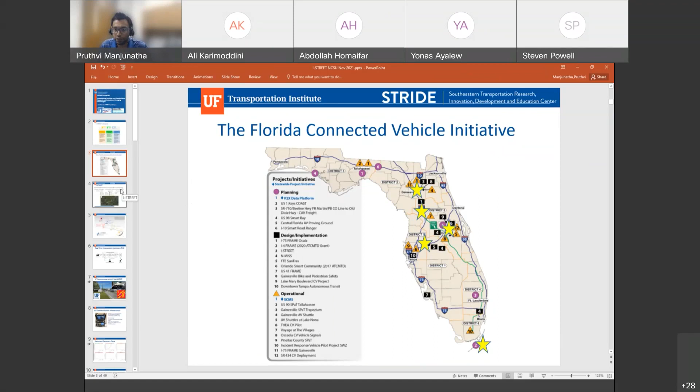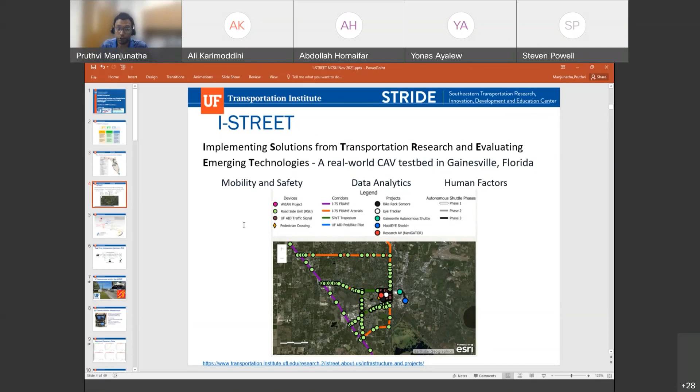So I told you today is going to be more of a story of iStreet. So we'll use this as a roadmap for our presentation today. This is how the presentation is going to flow. We started out in 2017, so I'll start in 2017, go through the key projects, and then we'll end up with present day and future.

Back in 2017, FDOT was figuring out this CV, AV, and CAV; terms were being thrown around, and they wanted us to do a simple literature study to see where the state of the art was at that time, and see how to bring Florida to the forefront of this. So when the conversation picked up in late 2016, early 2017, the City of Gainesville, UF, and the Florida Department of Transportation sat together and gave birth to the iStreet program. One of the first few funded projects under the iStreet program was co-funded by both Florida DOT and the National Science Foundation.

And as a product of that, we came up with this optimization software called Real-Time Intersection Optimizer. As you can see, there are three main black boxes here. One is a sensor fusion system. What it does is it takes input from different sensors, be it video, radar, lidar, DSRC signals, and it fuses all of them together to come up with a reliable vehicle arrival stream.

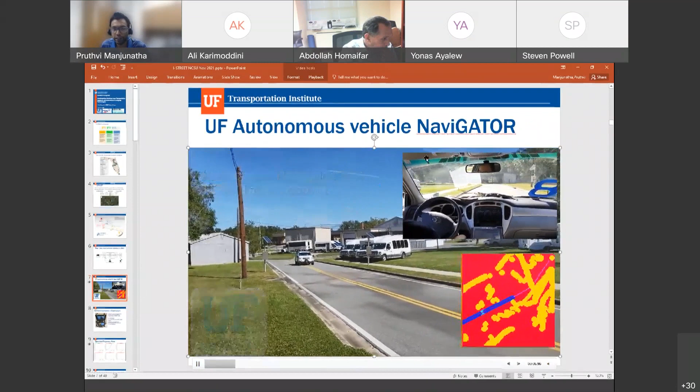So this is our AV. This is our custom AV from our mechanical engineering department. We call it the NaviGATOR. We use this. We also came up with our own custom OBUs. We built this radio kit ourselves. And then we took it out to the field and did the testing at the DOT facilities.

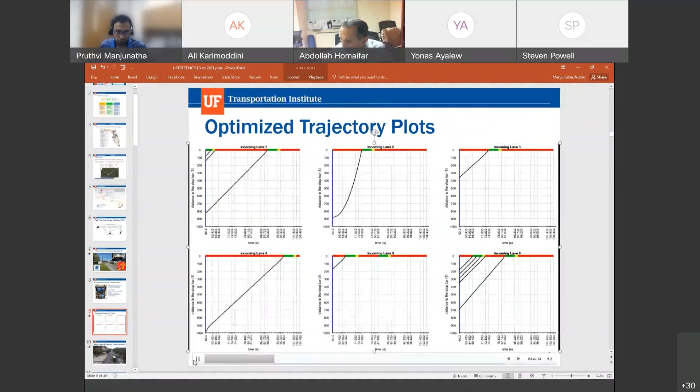So this is what a typical output of recommended trajectories looks like. With every iteration of the software, we are thinking about the best way to design these trajectories, to have a smooth movement, and not having to do the optimization routine n number of times. We are always trying to improve how this trajectory planning looks. So the next plan is to implement it on the actual road here in front of our football stadium, the Swamp. Once implemented, it should look something like this.

So the solid line actually is the tracking of the actual vehicle, which comes from the actual sensor fusion of radar and video and other sensors, whatever is available. And based on that, the bubbles that you see are the recommended trajectory for every second, right? 3 seconds from that point, it's supposed to be here, for example. So this is how our real-time intersection optimizer works.

This is a co-funded project by FDOT and NSF, and we got funded again a couple of years ago to add pedestrians and lidars into the mix. So this is a living, breathing project we intend to keep going. So once projects like that were born, FDOT also funded the I-75 FRAME project, where FDOT installed a number of roadside units on selected sections of I-75, as well as the arterials that connected to I-75.

Following that, FDOT funded multiple projects. One is the Gainesville SPaT Trapezium project, and the other one is the Gainesville Pedestrian Bicyclist Pilot. So the Gainesville Pedestrian Bicyclist Pilot is basically a number of CV applications related to pedestrians and bicyclists. It was funded a couple of years ago. Right now, it's still on hold because of right of way and other logistical issues. So it is supposed to go live pretty soon this year.

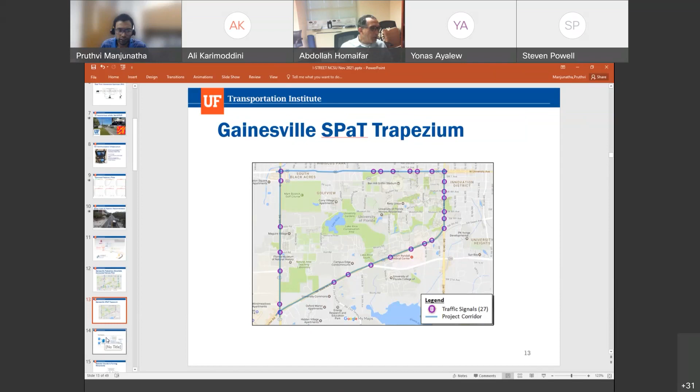So we developed this data pipeline to automatically get not only the roadside unit data and the logs from the roadside units, but also ATSPM data and the loop detector data. All of this is pushed into our AWS cloud, we store it and process it, and we have developed an algorithm to convert loop detector data into turning movement data. Once we manually edit each signal as an intersection and run this algorithm, it automatically generates turning movement counts from the loop detector data and any other sensor data stored on our cloud.

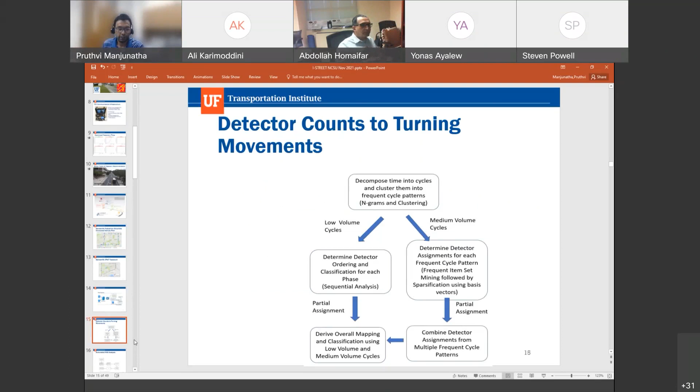Since we work with the McTrans folks associated with UF, who housekeep the Highway Capacity Software, we also have access to its backend. So we have created a system where we automatically convert loop detector data into turning movement data, and that is automatically input into our highway capacity files for each of these intersections. Every month or every week, we can monitor the level of service of all these intersections, so instead of one before and one after period, we have n number of after periods and can do a continual evaluation.

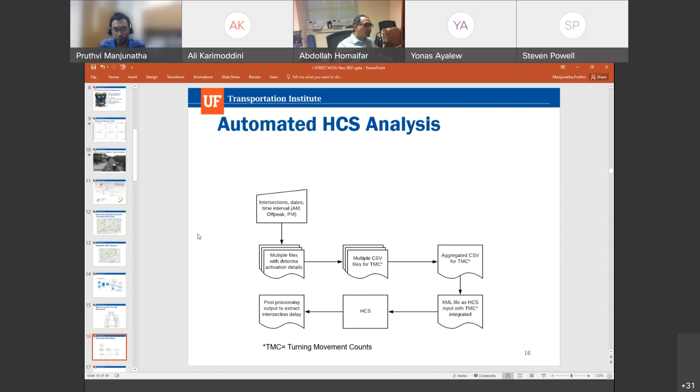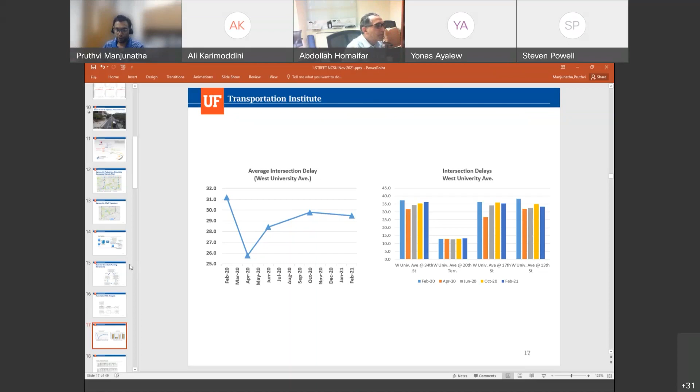We also, as I told you, interviewed the onboard unit users. Some of the things we found out from the interviews was that the OBU interface itself was very primitive, but the users still found the interface to be helpful, especially when it comes to warnings from pedestrians and bicyclists. UF campus has a lot of bicyclists, pedestrians, as well as scooter users. And the drivers said the warnings were actually helpful for them to be more cognizant of other road users other than other cars on the road.

And they also had suggestions for us, saying that instead of just a visual-based system, if there was also an auditory input, it would be useful. And also, if the OBU was integrated with an existing navigation system, they wouldn't have to use two different things for their GPS and the warnings. Those were some of the OBU experiences. Overall, it was positive, but there was definitely room for improvement, as indicated in our focus groups.

I'm going to take a small break here. Now that I've discussed these couple of projects, I want to see if there are any questions now, or if you guys want to keep the questions till the end. So one quick question is, were there any attempts to infiltrate your OBUs or any of your other infrastructure?

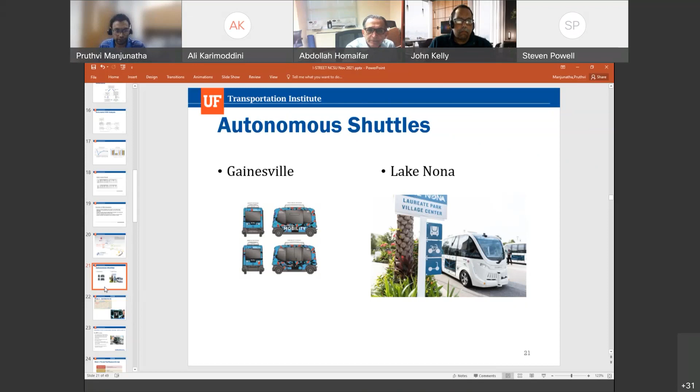One of the interoperability things I mentioned was, when this shuttle comes close to UF, it intersects with the previous SPaT trapezium project I mentioned. So when it's going through one of those RSU-enabled intersections, there is an OBU inside the shuttle. It is able to easily talk to the RSU, and it gets the signal and it makes the turn automatically. Typically, if you look at some of the other shuttle deployments, when there's an intersection, the service operator usually manually operates the shuttle. But in our case, in Gainesville, it's completely CAV enabled.

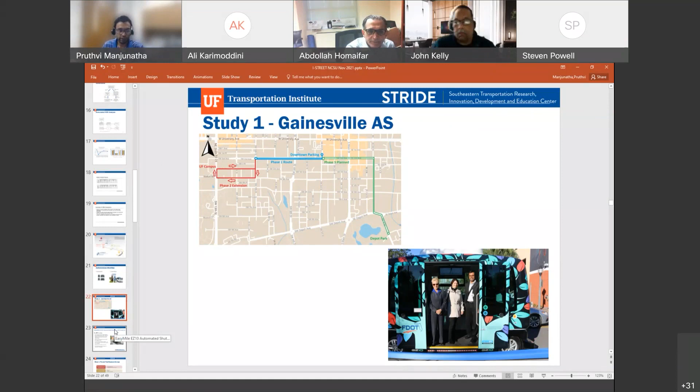Having iStreet as a program is useful in this sense because there are two different companies that are operating, and somebody had to bring them together and make this work. So small changes like this, which can add big value, is where iStreet has its role.

I'm pretty sure, if you are in the world of connected and autonomous vehicles, everybody knows that there are basically three major shuttles in the US. One is the EasyMile shuttle, the other one is the Navya, and the third one is the Olli. Right now, I believe EasyMile is number one, followed by Navya, and Olli is catching up with them soon in terms of the number of deployments in the US. And most of these shuttles, although they say they can go up to 25 miles per hour, actually operate anywhere between 10 to 15 miles per hour.

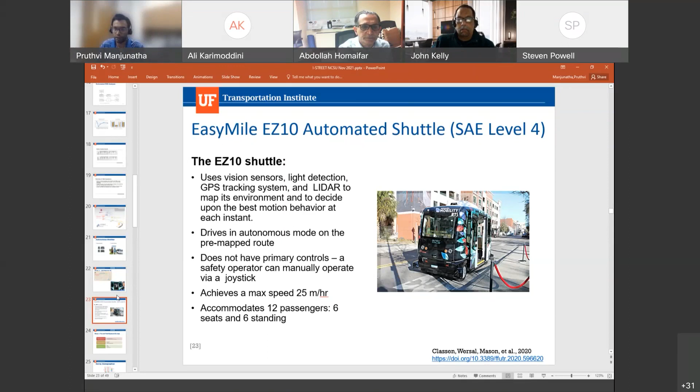This is because the more elements there are on a road network, the slower the shuttle is to react. I talked to the shuttle operators and the EasyMile folks and the Navya folks. The common message I'm getting is that the limitation is because of the capability of the sensor suite. If they have a better sensor suite, they can actually operate at 25 miles per hour, but the cost doesn't exactly work out right now. So the short answer is, although they say it goes at 25 miles per hour, at any deployment in the US it's typically 10 to 15 miles per hour. That's going to be an interesting thing as I talk about this study.

In our survey, we basically concentrated on three different categories. One, the travel behavior and technology use of the participants and their demographics. And as far as the shuttle is concerned, most studies in the literature only care about the shuttle riders themselves, and they don't really survey how a driver or a pedestrian would feel if they have to interact with a shuttle. So those two components were added in our survey, compared to the literature.

So here are some interesting results. In terms of survey demographics, our after survey had to be done in the post-COVID era. So most of our after survey was online, and we did leave some QR codes on the shuttle itself and at the shuttle stop. So we got way more women responding in our after survey, because the literature shows that women tend to respond more if the survey is online, and also because the college students were not as much in Gainesville during the post-pandemic era. We had the under 25 demographic go down in our survey.

So we asked questions like how comfortable they are, either riding in the shuttle or interacting with the shuttle as drivers and pedestrians. As you can see, for riding, they were tentative in the before survey, but once they have taken the ride, or at least seen the shuttle themselves, their confidence goes up dramatically. They strongly agree that they're very comfortable taking a ride in the shuttle. The same thing with pedestrians and bicyclists.

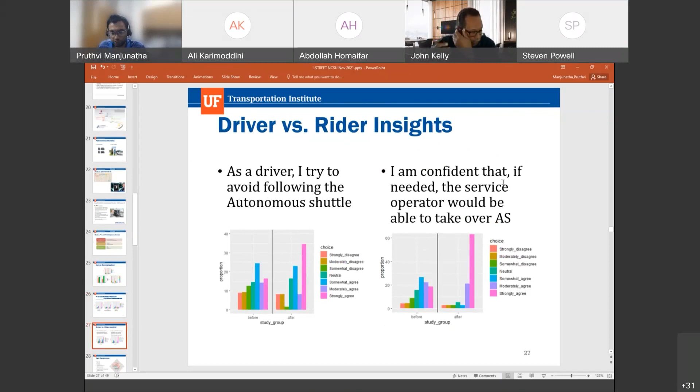We also did a text cloud based on the text responses. The first major category was always about the speed. Why is this shuttle so slow? Why is it clogging the road? So the speed limit both in Gainesville and in Lake Nona was 25 miles per hour, and the shuttle goes at anywhere between 10 to 15 miles per hour. Obviously, the drivers are going to get frustrated.

In Gainesville, we also have traditionally this east-west divide. The west part of Gainesville is high income, majority white neighborhoods, and the east part of Gainesville is low income and minority majority neighborhoods. And these comments mostly had to do with Gainesville traditionally rather than the shuttle itself, as to why are the authorities spending so much money on the shuttle rather than improving the bus service in my area. Those are the sorts of questions we are getting.

But this is a misinformed opinion, because this was not funded by the city of Gainesville, right? This was funded by the Florida Department of Transportation. And if Gainesville said no, they very well could have taken this pilot somewhere else. So it was not that those funds could have been used to improve the local transit service, right? So again, this comes into miscommunication between the authorities and certain neighborhoods.

I'm talking more about this because we also did a study in parallel to assess the mobility and accessibility in different neighborhoods in Gainesville. Even in that focus group and that survey, we found this to be a common factor. And many of those surveyed didn't even know that Gainesville had a driverless shuttle, even though it was the after survey. And because of COVID, we also had some concerns about social distancing and shuttle size and so on.

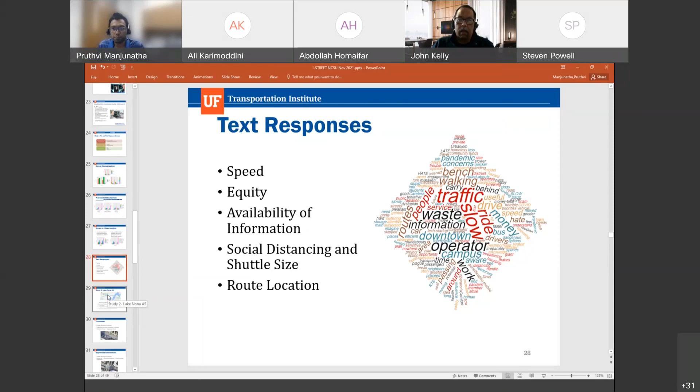So the next study I'm going to talk about is in Lake Nona, what we did was we put cameras in... Can I ask a different question? Yeah. Okay, in these autonomous vehicles, do you still have a driver in the loop in the car? Yes. Right now, most of these shuttle services have a service operator, although they don't do anything.

And then the result that you mentioned, whether passengers are confident and all that. Have you published those results, or can you share that information with us? Yes. We have a TRB paper coming up, so I will share the TRB paper with you. We are basically interested in the opinion of the passengers, how they feel about this autonomous vehicle. Yes. We are making the corrections as we speak for TRB in time. So I'm more than happy to share that with you.

And what about the data? Do you have a data set available for this study? Yes, we have the original survey. I will get in touch with my co-PIs to see to what extent that data can be shared. Sure. Okay. Thank you.

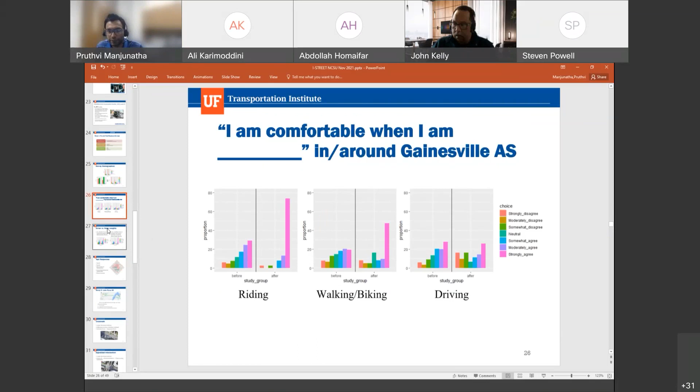All right. So for the second study on the autonomous shuttle, we went to Lake Nona. Basically, we put up static cameras. We took the permissions from the township and the operators to do this. We put them in three different locations: a crosswalk, a signalized intersection, and an all-way stop intersection, to see what sort of behavior we would observe. And we did it over a period of 2 days when we had relatively higher foot traffic from pedestrians.

There was a temporary island created because on farmers market days they have way more pedestrians than on other days. So they put up these temporary fences that created an island for the benefit of the pedestrians, but that messed up the detection of the shuttle. So the shuttle was often getting confused. Sometimes it would stop thinking that it's a pedestrian. Sometimes it would just go.

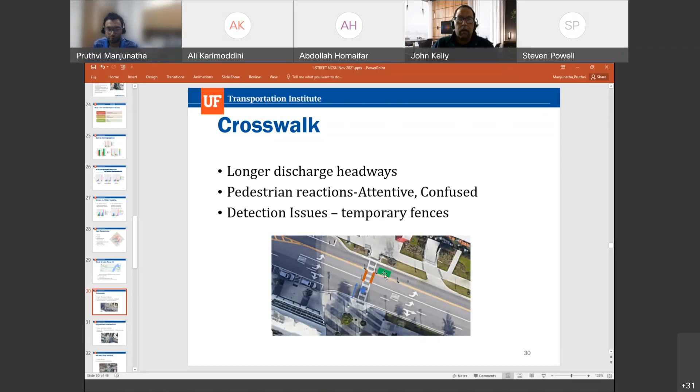And when it came to signalized intersections, because the shuttle was so slow, we saw this multiple times. Even before the shuttle, which is green, would go through the intersection, the vehicle behind it would make an illegal passing maneuver inside the signal box, right? Because of the slowness of the shuttle.

And similarly, there is a problem with the communication of the intention. At the stop-controlled intersection, the shuttle was supposed to make a left turn, right? So this is an all-way stop-controlled intersection. Everybody gets their right of way. So when the green shuttle wants to make the left turn, the blue through vehicle is supposed to give its right of way when it's the turn of the shuttle.

But the shuttle is sometimes so slow when it is making that turn that the blue human-driven vehicles actually think that the shuttle might be waiting for them to cross. So sometimes we see some dangerous maneuvers where some drivers just take off, although the shuttle has already started to make an extremely slow but definite maneuver to make a left turn, right? So there are a lot of safety-related issues that can come out of such a deployment.

So doing an observation using the cameras was helpful for us to come up with these nuts and bolts issues. Also, it confirmed what we already knew from our Gainesville study, that drivers are getting frustrated because of the slowness. And here on the video, we captured that because of the frustrated drivers, we are seeing a lot of illegal maneuvers, passing and aggressive maneuvers, which is going to be a safety hazard.

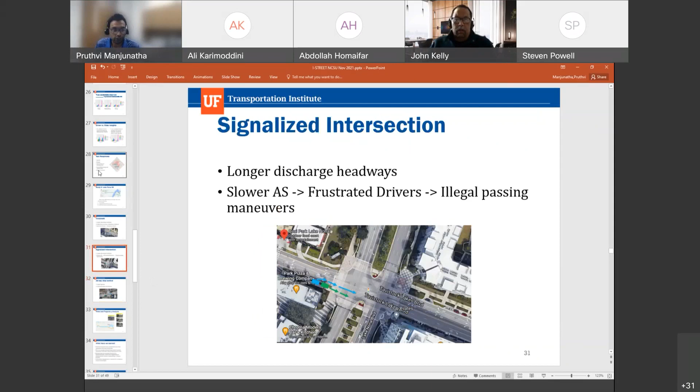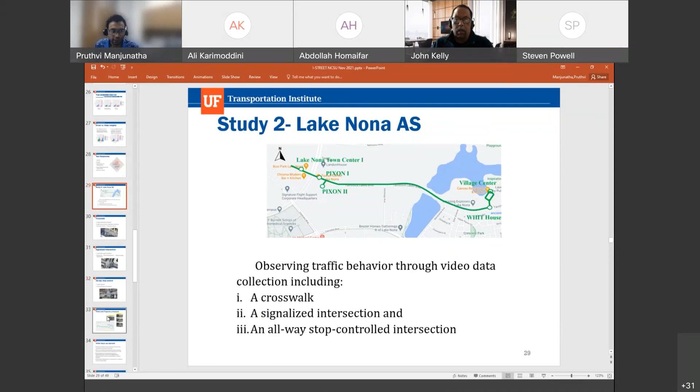And that dedicated lane also is intersecting with the traffic intersection as well, or no? So the dedicated part is actually between this all-way stop and the signalized intersection. I can actually show you in the map. So this is the intersection and this is the all-way stop. So I believe a small section in the middle has been remarked as dedicated right now. Okay, I see. Thank you. Yeah, great question.

So, along with the videos that we took ourselves, we also had access to the shuttle video facing outwards. Of course, they couldn't give the shuttle video facing inwards because that would be a privacy issue. So we got the videos from the shuttle looking outward. That means we were able to capture the human-driven vehicle that is following the shuttle, right? And we also got the trajectory data of the shuttle from the GPS mounted on the shuttle.

So when we combine the trajectory data with the video data, we can actually come up with leader-follower trajectories, right? And when we have both the autonomous leader and human-driven follower trajectory, now we have a data set to model human-driven vehicles. So we use a combination of image processing and trajectory manipulation to come up with this trajectory data. It's still a work in progress. We are planning to model human-driven vehicles in the presence of autonomous vehicles using this data. Should I say that this is studying the behavior of a driver when he's stuck behind a slow autonomous car? Yeah, you can say that.

Right now, you can also say that it's basically studying behavior of human-driven vehicles behind a very slow-moving traffic. That's absolutely right. Yeah, but as far as the fundamentals are concerned, the basic methodology is concerned.

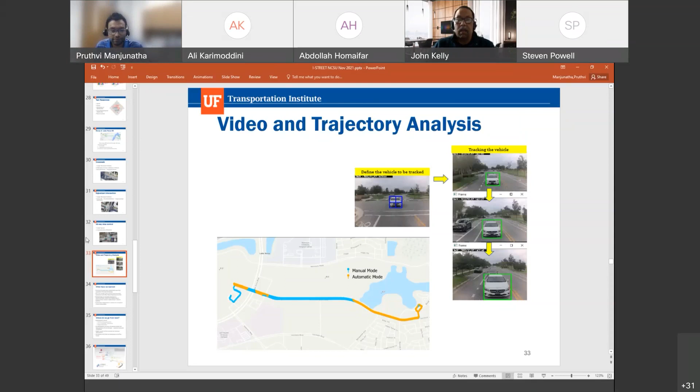Okay. So what we learned from both the studies is people are getting used to this technology and they're warming up to the idea in a positive way. Major concern is the slow speed of the autonomous shuttles right now. And for both of the studies, we had to work with multiple stakeholders. With Gainesville, it was EasyMile, the shuttle company, Transdev was the shuttle operator, City of Gainesville, and RTS was the transit agency responsible for the entire project.

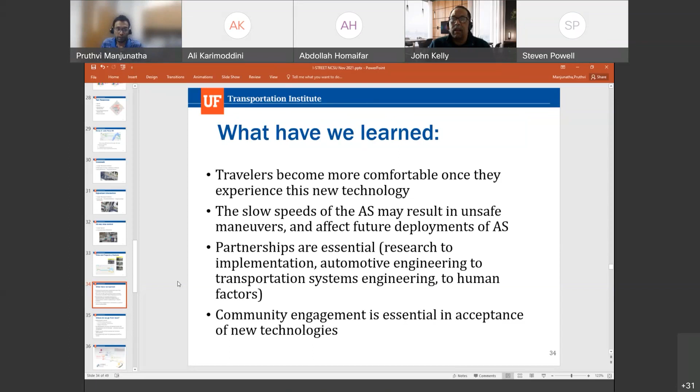Siemens folks were the ones providing the RSU signals, and with Lake Nona, we had to work with the Tavistock Township folks and the operating company Beep. So having this relationship is extremely important not only for smooth operation of the shuttle itself, but also to do any kind of research and evaluation, and taking these pilots from being just a pilot to where it will lead in the future eventually. And obviously, community engagement is very essential, and communication is key.

So I'm going to take another break here before I move on to some of the other projects. Any questions so far?

So maybe as a follow-up to the previous question about dedicated and mixed traffic, when you were using the EasyMiles in a mixed traffic setup, how was the difficulty as far as the regulatory aspects? Was it taken care of by you or EasyMile? How did you manage that situation?

Yeah, that's a fantastic question, actually. So typically the shuttle operator in Gainesville's case is Transdev, right? Although EasyMile is the manufacturer, the operator was Transdev. So whoever is operating the shuttle is supposed to directly communicate with NHTSA to obtain all kinds of regulatory waivers or permissions or permits.

But having the stakeholder alliance was useful because, in conjunction with City of Gainesville cameras and traffic data, we were able to pull up traffic data, historic safety data and things like that for Transdev, and Transdev did their own mapping and other things. So when they submitted it as a package to NHTSA, it was way easier to obtain those waivers than the operating company trying to do it in isolation. So it's usually the operating company which has to file for all these things, but it helps a lot to have a healthy stakeholder network.

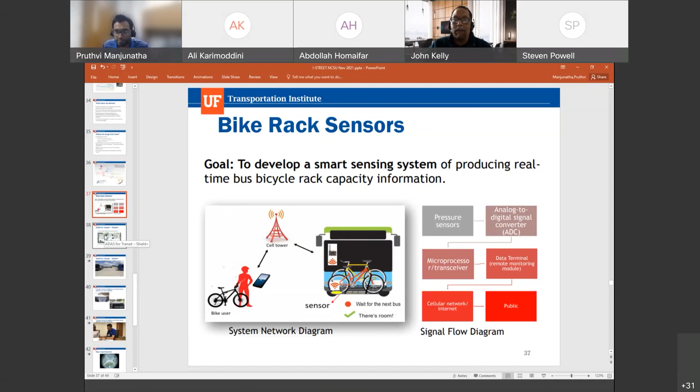So we put sensors in the bike racks, and we created an app where people could see not only whether the bus is full, but also whether it has an empty bike rack, so they don't wait unnecessarily. We also had a Mobileye ADAS system on our RTS buses. Mobileye Shield Plus is a warning system for bus drivers, for pedestrians, forward collision and other warnings. We did a quick evaluation study, and this is a quick video of the Mobileye system.

As you can see, whenever there's a pedestrian crossing, a warning pops up, and the driver gets to know. There are multiple applications for this system. We also did a study on the best way to send warning messages to drivers. So we used two different apps, Travel Safely and one more app, I forgot the name.

And we ran the vehicles through a school zone as well as in a bicyclist zone where we had bicyclist participants. So what we did was we put eye trackers on the drivers and made them drive through the school zones where the bicyclists were present. So we were able to capture the eye gaze of a driver when they're driving through a school zone. We were able to see for how many seconds they're looking at the app, for how many seconds they're looking at the pedestrian, how many seconds they're looking at the road.

And we did it in 3 different modes. One was a stealth mode where we didn't give them the app. The second one was an audio-visual mode where we put both audio and visual warnings. And the third one was an audio-only mode where we didn't give the app as a visual mode. We only sent them messages through an audio message.

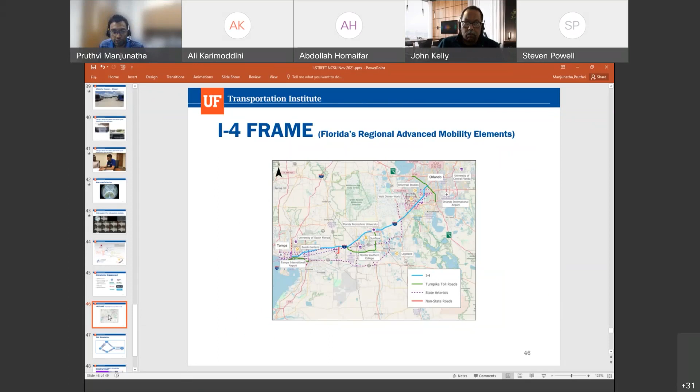We are working on how to simulate CAVs in VISSIM, because VISSIM is widely used simulation software. We have come up with a framework to simulate CAVs in VISSIM, and we are continuing to work on how to efficiently do this and answer a lot of questions related to simulation.

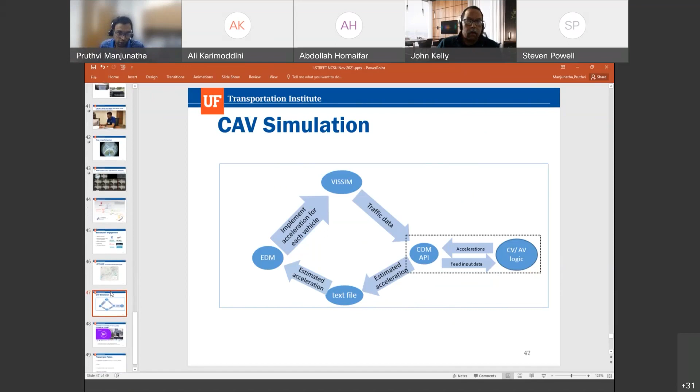We held what is called a mobility challenge event with CoMotion's folks. CoMotion is basically a new cities initiative where they do 2 major conferences a year, one in LA, one in Miami, around the topic of mobility and how to use technology to improve mobility. So this year the primary panelist and guest was Secretary Buttigieg. And the event happened in Miami, although he participated virtually. So one of the key sessions was the CoMotion Mobility Challenge event.

We invited everyone from the world. We gave them a data set. We told them, use this data set however you can to come up with some sort of safety or mobility solution. So 9 teams submitted proposals out of the 15 teams which showed initial interest. 3 teams were chosen as finalists and 1 was picked, and that team is right now working with the City of Gainesville on a prototype for an intersection safety dashboard.

Yeah, so we are doing a number of projects. As far as the present and the future of I-STREET is concerned, we recently rebranded ourselves as a living lab because we are growing exponentially every year, and we are redefining who we are and what we do.

So we see a bigger role for ourselves within Florida as well as nationwide when it comes to CAV or any emerging technology. And as you know, because of all the rules concerning FCC, DSRC is an old thing now, and CV2X is a big thing. So things are moving forward in that direction. Nationwide, we are looking into that.

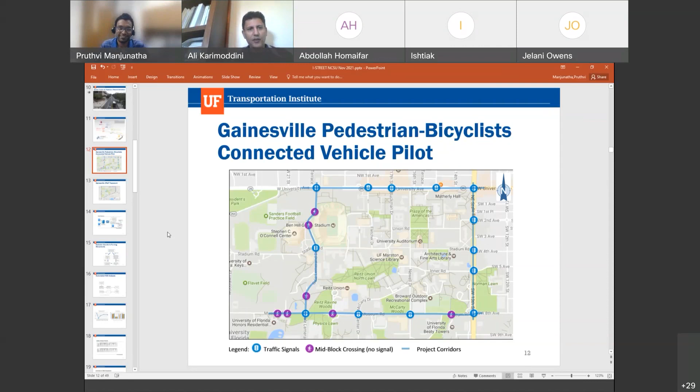I enjoyed learning more about the detailed initiatives through I-STREET. I was curious about the perspective of University of Florida and Florida DOT on the long term, specifically integrating some of these pilots with predicting what the behavioral changes would be, and how many years we are looking into for predicting the plans for transportation. Hi Venkatesh, nice to see you after a long time.

So Dr. Sanjay Ranka from computer science is actually coordinator for the data aspects of a lot of these CAV projects, even projects I-STREET is not evaluating, for example ones USF or other Florida universities evaluate. Florida DOT has this vision within the I-STREET program of a data analytics wing where not only we ingest and process a lot of data, we also use it to start predicting where bottlenecks are likely to come and what traffic patterns are predictable.